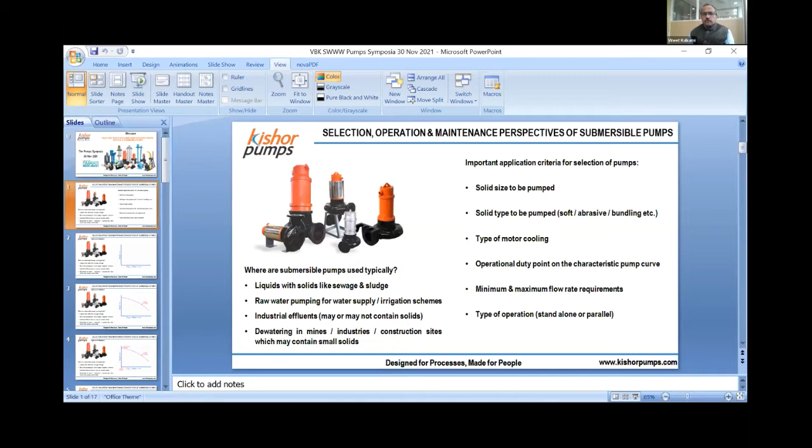During the panel discussion also, this topic has been discussed in detail, that selection of a proper pump plays a very important role in the overall life cycle of the pump as well as the system. In our company, there is a saying that service before sales will save you service after sales. This means the larger the interaction you have while selecting pumps with the end user, the consultant, or the turnkey contractor, the better it helps you select a proper pump which, if operated properly, gives the optimum solution. So in my presentation, we are talking about submersible pumps.

Where are these submersible pumps typically used? As we know, the maximum use of submersible pumps is in the wastewater industry. This technology is now well established in India for more than 30 years, and almost all wastewater plants are specified with submersible pumps for sewage as well as sludge application. Apart from wastewater plants, these pumps are also widely used in raw water pumping for water supply and irrigation schemes. This is the success of submersible motor technology being well established within India.

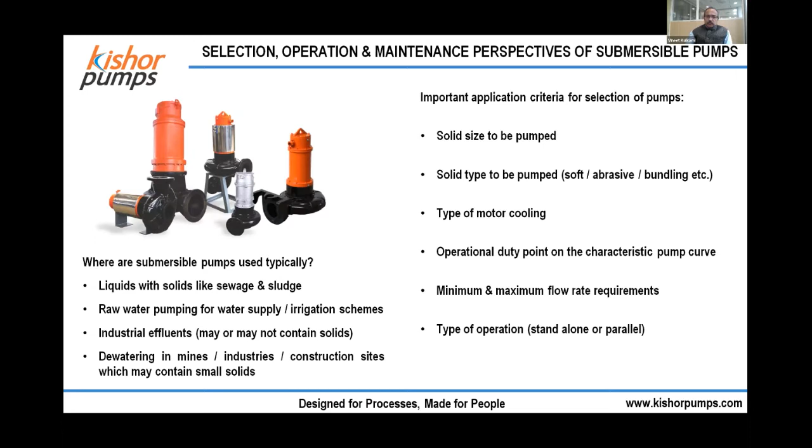Now this is slightly basic. When we say select any pump, it is selected and characterized by the pump performance curve, which is the relation between flow and head. You normally tend to see the shut-off head, whereas the flow is zero and the head is the maximum on the characteristic curve, where you are not expected to operate the pump.

So you always try and tend to select the pump near the best efficiency point. The best efficiency point is the point on the characteristic curve at which, for that flow and head, the efficiency will be the maximum for that particular model. If you go either to the right-hand side or the left-hand side of the best efficiency point, efficiency decreases in both cases. So it is necessary for the manufacturer to ensure that the pump is selected near the best efficiency point.

Of course, this depends upon many factors like the flow specified, the head specified, and the solid handling requirement. In some applications, especially industrial applications, you might have a flow requirement of say only 20 meter cube per hour, but a head as high as 30 or 40 meters, and still require a solid handling capacity of say minimum 25 mm or 50 mm. In such cases, it is very difficult to get the pump at the best efficiency point, but all efforts should be made to select the pump near the best efficiency region.

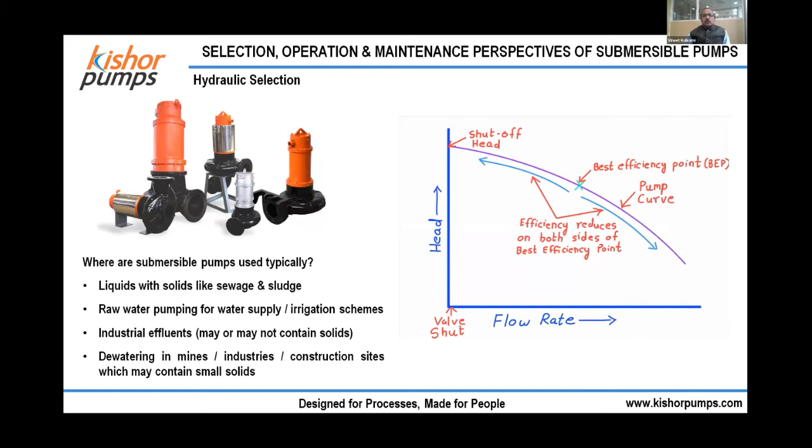Now this is the most important point for any submersible or, for that matter, any solid handling pump. As we said, in the wastewater industry or even in industrial plants, there are many applications for which submersible pumps are used. In a treatment plant, as covered by Siddharth sir in his presentation, there are many applications from raw sewage, to RAS which we call return activated sludge or surplus activated sludge, dewatering, and at the end of the plant there is CCT, that is after the treatment.

For all these applications, although the type of pump is the same, you don't require identical solid handling capacity. For raw sewage application, you will need maybe 100 mm solid passage. For sludge application, 50 mm solid passage is sufficient. For dewatering applications or just wastewater application, 25 mm solid handling capacity is sufficient. And for clear liquid, you don't require any solid handling capacity for that particular application.

For this, every manufacturer now normally has different series, and it is very important to specify the correct solid handling capacity for the users, as well as for the manufacturers, to understand the application from a solid handling point of view and offer the correct pump. Because for the same duty condition, a 100 mm solid passage pump will have the least efficiency, and a clear liquid pump will have the maximum efficiency. This is because of the impeller design - the non-clog impeller design required to handle solid particles means the hydraulic efficiency of the pump is inversely proportional to its solid handling capacity.

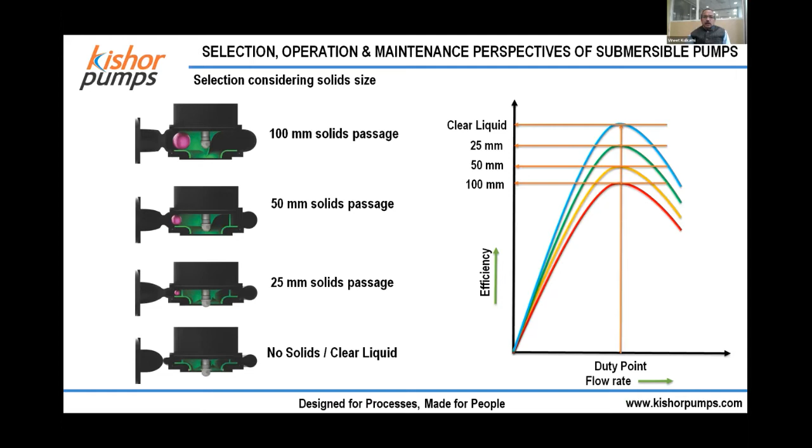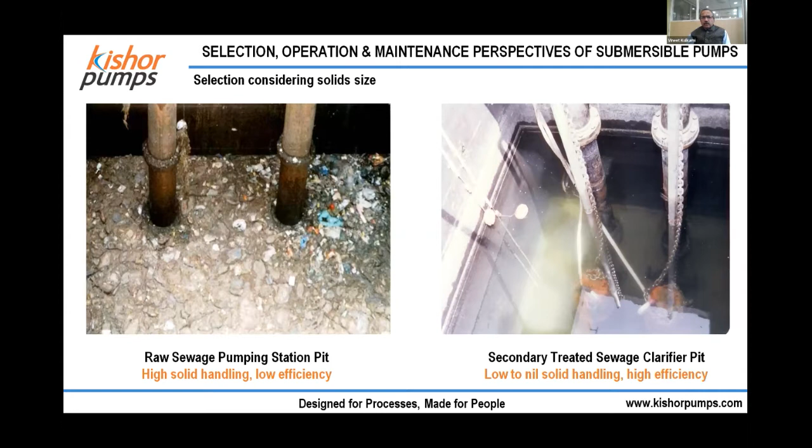Typically, as discussed in the panel discussion, consultants or end users have a tendency to specify, say, 75% efficiency generically for any submersible pump. But our experience says that when we talk of submersible sewage pumps for handling raw unscreened sewage, reliability should play a major role over hydraulic efficiency. Because to achieve that hydraulic efficiency of 75%, if we compromise on the impeller design or solid handling capacity, the pump might give 75 or 80% efficiency at the test bed, but on actual site it will not perform at all. So reliability is jeopardized, and that hydraulic efficiency is of no use if the pump cannot perform for the application it is designed for.

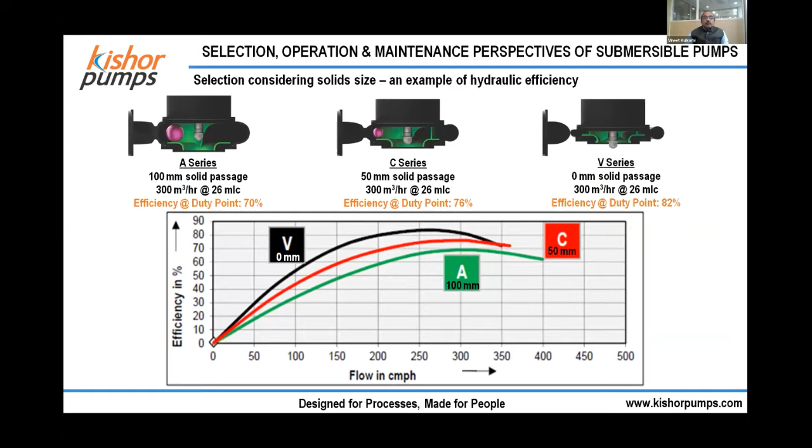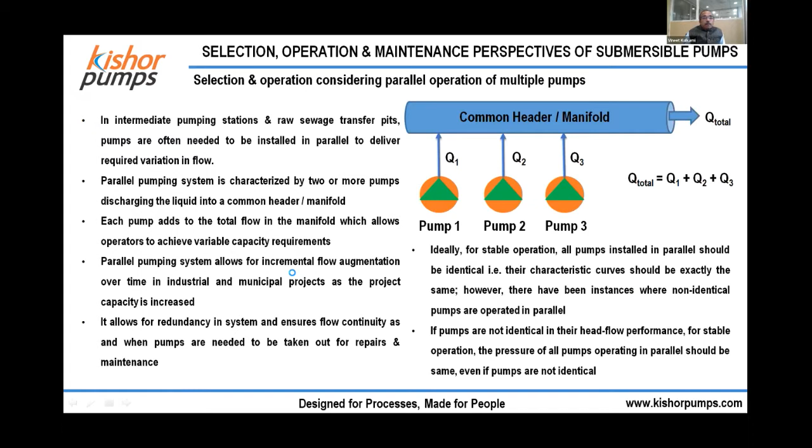But when you select a pump, you need to take care that it can operate at the maximum head as well as the minimum head. And if there is a large component of frictional head between the operation of single pump, 2 pump, and 3 pump, such large variation cannot always be possible in a constant speed operation pump.

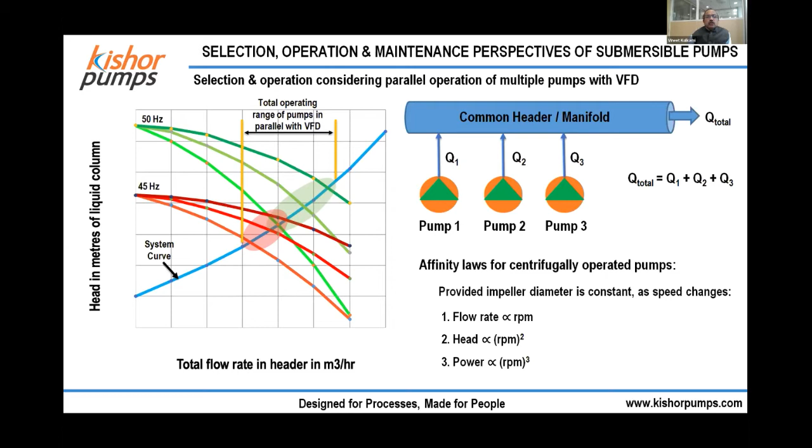Using this principle, we can use VFD effectively to have a flexible operating system. We can see that when the pumps are operated at 50 hertz, the head is like here, and when operated at 45 hertz in single pumping operation, head is here. So this large variation in head and this large operating range can be achieved well using the VFD, which is now effectively used in all sewage pumping stations and sewage treatment plants.

Now, having said about the selection and operational aspects of submersible pump, there are two important aspects for trouble-free operation of the pump. That is the installation, which we will see in brief.

First important thing required to take care of during installation is strong foundation. Majority of submersible pumps are used with an auto coupling arrangement, and it is necessary that this auto coupling arrangement is properly grouted with a strong foundation, so that the pumps are not subject to various vibration issues.

Then when you install the pump, there is a typical issue that pumps are installed today, but used after say 1 or 2 months when the site is ready in all respects. For that, it is necessary that you ensure the pump cable is not submerged in the liquid. These pumps are all provided with a special submersible cable with a special sealing arrangement, but we need to ensure that the pump cable is not submerged in the liquid, to ensure that any moisture or liquid doesn't get into the pump through the cable.

Now, as we all know, submersible pump is a monoblock pump, where the submersible pump and motor are a single unit. Because of solid handling issues, pumps are subjected to very adverse conditions, which always have an impact on the motor. So to save the motor from any adverse impact, all submersible motors are provided with certain basic safety features like overheating protection, seal wear out sensor, low liquid level control, etc.

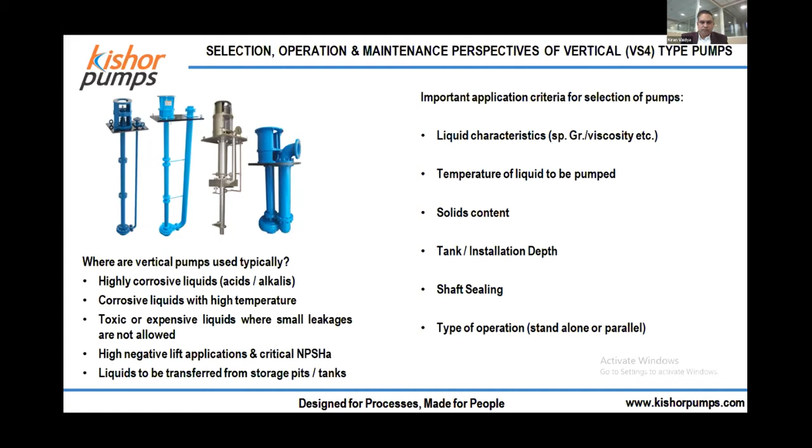Now, what is radial thrust? In vertical pumps, the biggest enemy is the radial thrust. It is the force resulting from the pump delivering liquid through the discharge. It is a function of the head or pressure generated by the pump and the vane thickness. It acts perpendicular to the direction of rotation. In vertical pumps, the effect of radial thrust is more pronounced because of the longer installation depths. As you increase the installation depth, the number of shafts increases, the number of joints increases. So the higher the installation depth, the greater the possibility of damage, because the radial thrust will be acting much more for that type of installation.

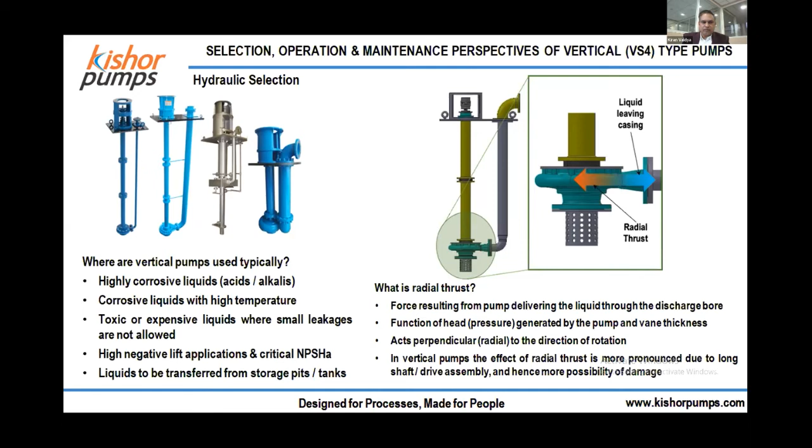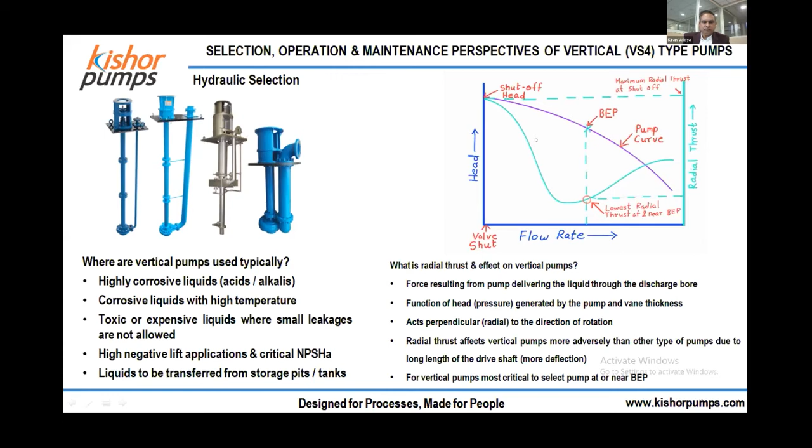Now coming to the benefits or advantages over horizontal end suction pumps. First, priming. In vertical pumps, priming is not required because the casing and impeller are always submerged in the liquid. But in horizontal pumps, priming is mandatory, it is required. Shaft sealing is optional or probably eliminated. As I explained, for the majority of applications, sealing is not required, barring a few. For high temperature applications, you need a gland packing or mechanical seal. For some solvent applications, you have to go for a mechanical seal. But in horizontal end suction pumps, shaft sealing is mandatory.

Leakage in the pump is not possible, because even if there is any leakage, it will again fall into the tank. But in horizontal pumps, there is a possibility of leakage, because even if you go for a mechanical seal, there is no 100% sealing. You cannot assure it. So slight leakage can damage your foundation and the environment.

Next, use in suction lift applications. This is the better solution for suction lift conditions, that is negative lift. Because, as I explained, in negative suction you have to have a priming chamber, you have to provide a foot valve. Suppose solids come in between, your priming will not take place, so you will face problems in horizontal pumps. But this gets eliminated in vertical pumps. You don't require anything.

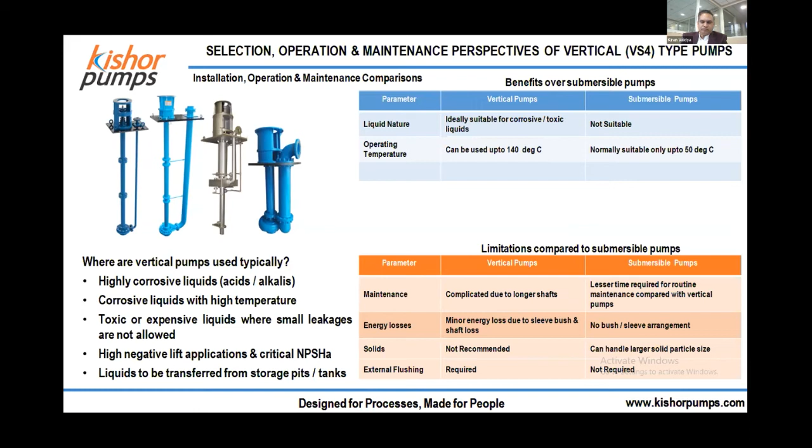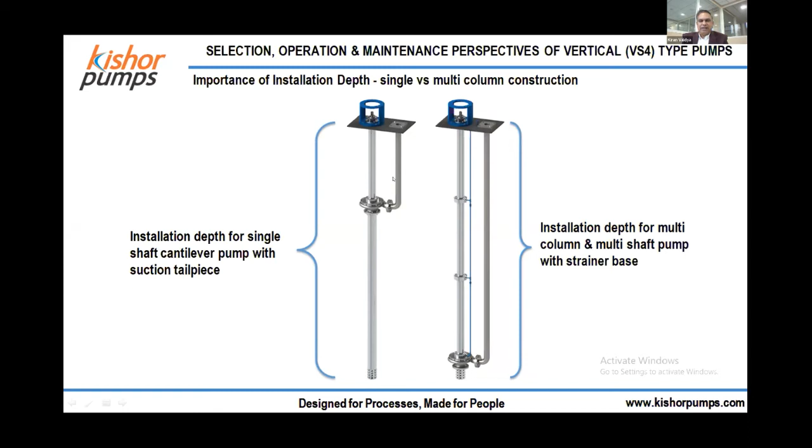So this is the installation depth for single shaft cantilever pump with a suction tailpiece, and this is a multiple column shaft. Here the problems are more because of the vibrations and all. I will explain through the next slide what are the advantages.

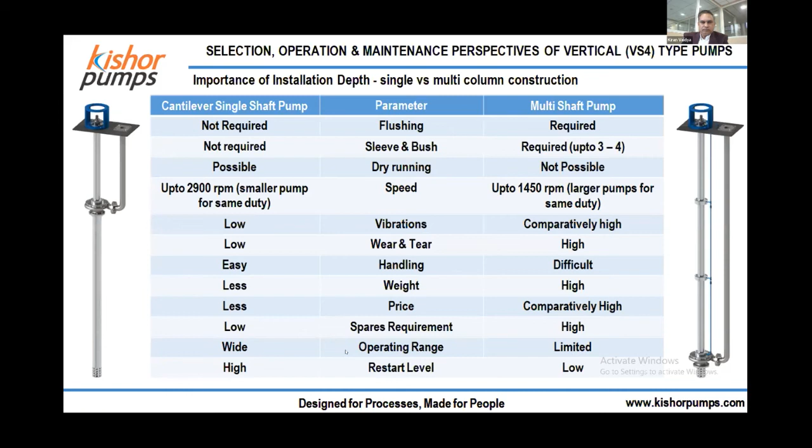Now, I will explain this case study in a power plant on a boiler blowdown. What happens exactly if we get incorrect or insufficient data at the inquiry stage. This case study explains the typical problems users may face while using vertical pumps. For this application, it was not possible to use a horizontal end suction pump because of the high temperature and high suction conditions. Vertical pump was the correct solution.

The application given during the inquiry stage was water with 25 mm solids, but the actual application was pumping boiler blowdown at 90 degrees temperature. So you can see the difference between what was given and what were the actual site conditions. Pump installation depth required was 4 meters, so there was a 3-column construction.

External pumped liquid for shaft lubrication was not available because it was having 25 mm solids. We had provided external flushing, but the flushing water was not there. And even if external flushing is given, the water loses its lubricity above 80 degrees, so there was no point in giving external flushing at 90 degrees.

We went to the site, analyzed everything, and finally we gave them a cantilever pump with a suction tailpiece without any bush bearing, and the pump is running for the last 8 years. So this is why the selection is more important, and why a pump manufacturer asks questions at the inquiry stage. One should understand it depends on the operation and the maintenance.

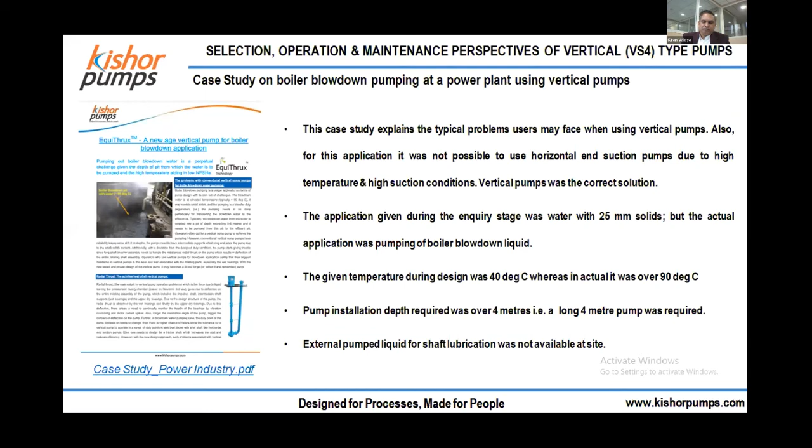Now, what care is to be taken during the installation of vertical pumps? In case of liquid containing solid particles, external flushing at a given pressure and flow should be available at site for trouble-free maintenance. Proper alignment of pump and motor coupling is to be done to avoid deflection of shaft. This is the most important thing.

Provision for setting the lowest liquid level and highest liquid level. The pipeline beyond the delivery flange should be either equal to or more than the pump discharge diameter. And while handling the pump, always lift the pump from the column pipe. Do not lift the pump from the delivery side pipe, as this way the delivery pipe may bend and get damaged.

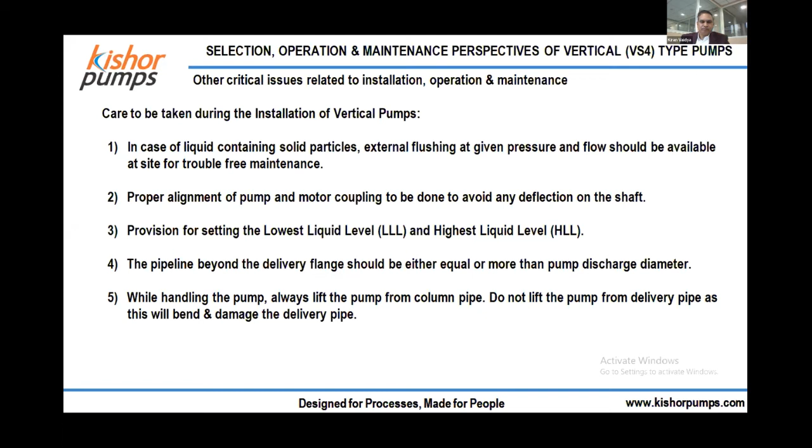So with this, I end up my presentation. Thank you.

So Kiran, we do have some questions for you. We have Kamlesh Kumar Punj asking: can we use vertical glandless pump for condensate application having temperature in the range of 70 to 80 degrees centigrade? If it's an open sump, then definitely you can go for a glandless pump, but if it's a closed tank, then one should go for at least minimum gland packing.

Let me select the question. So the question is, can we go for replacement of mechanical seal and use gland packing instead if the pump is having a height of 4 meters or more than that? Yes, it is possible.

Kamlesh Kumar is asking, what is the maximum length for a single shaft with the arrangement of double discharge pipe, without using an intermediate bush bearing? For a single column cantilever, 1.8 to 2 meters is the height.